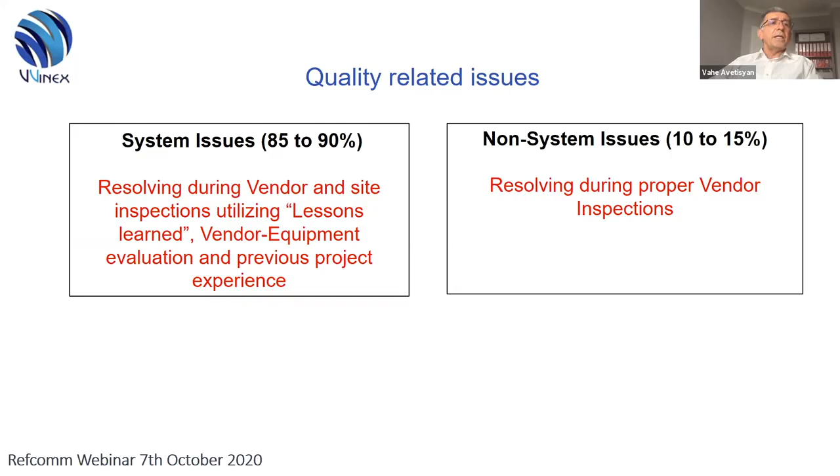System issues are those which can be predicted based on previous projects' vendor evaluation, lessons learned, and contractors' evaluation for site activities. And these issues are somewhere between 85 and 90%. As non-system issues, the following can be considered. For example, wrong connections are applied, from wrong flange size and location up to wrong cable connections and wrong cable size. Wrong painting is applied, painting system or thickness. Wrong flange type is installed, or wrong material is used for construction of valves or fittings.

And other system issues like valve leakage rate, incorrect wiring and cabling on equipment and skids, nozzle orientation and location on the vessels, tie-in points, vibration issues on rotating equipment, pump and compressor performance data, and not fully tested control systems. In today's webinar, we will concentrate more on system issues and how to eliminate them. We will mention those issues later for each type of equipment. And one important thing, as I always mention, you don't usually get what you expect, but exactly what you inspect.

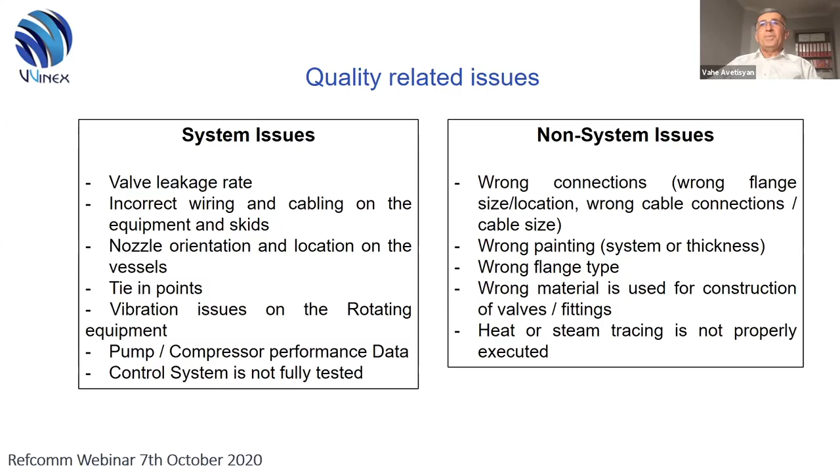Different approaches to project QA/QC affecting final results. There are three main approaches to organize and put together a QA/QC team for project control of QA/QC activities. One is where QA/QC is the sole responsibility of the EPC contractor. The second one is when QA/QC activities are controlled in parallel by EPC and owner. And the third one, when there is an integrated team to control QA/QC activities. Each of the above systems has advantages and disadvantages.

The first approach is more commonly used during lump sum and turnkey projects. In this case, all activities are fully controlled by the EPC contractor, including inspection and expediting. In our experience, this approach leads to the situation when some operational topics are not fully controlled during the manufacturing stage and can be critical during installation, startup, and commissioning, and even further for operation. Of course, this is a less costly approach, but needs a final detailed verification on site when equipment

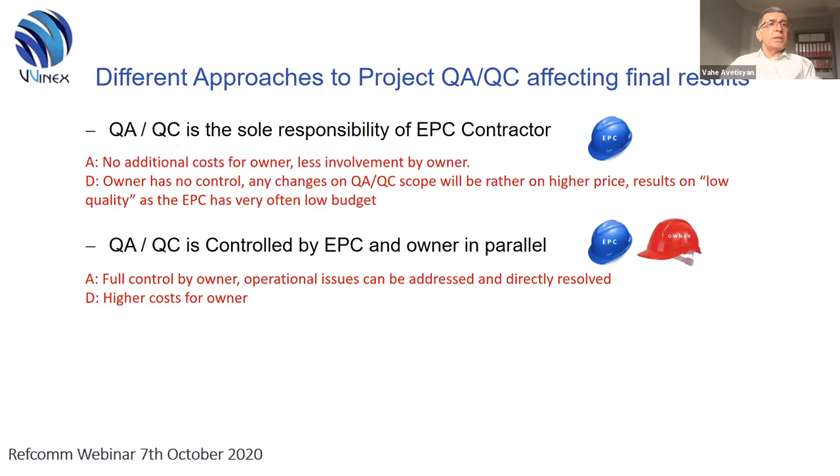Second approach is parallel coverage, when both parties, EPC and owner, are fully involved in QA/QC activities. EPC contractor still has full responsibility. However, proper input from the owner operator side can be beneficial for final results. However, this is a very costly approach as all activities are actually doubled, although that gives more complete results. As an advantage, full control by owner, operational issues can be addressed and directly resolved, but higher costs for owner.

And the third one, the integrated approach, which is a kind of combined approach where all topics, including operational ones, can be covered. But this approach requires quite a complex management of the QA/QC team, as EPC and owner in some areas have different priorities. From the point of view of total cost, this is an approach in between the first two. Less cost for owner, more coverage and involvement as an advantage, and as a disadvantage, complexity of the management of the entire QA/QC team.

Recently, I ran a poll on LinkedIn, and it showed that the parallel and integrated approaches are more preferable, and both showed about 40% of the results. That means the owner operator needs and wants to be fully involved in QA/QC activities throughout the entire project. And in our experience, the ideal approach is when owner's QA/QC team is fully dedicated only to the project.

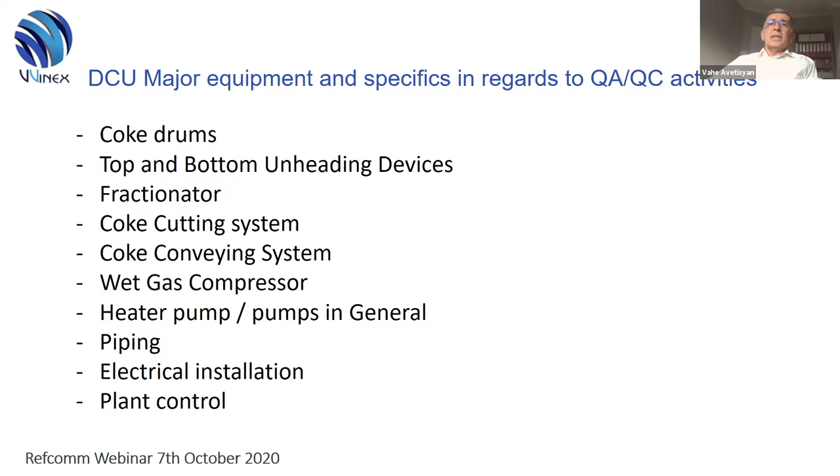Piping and electrical installation are very important because they showed more non-system issues, quality related, and these issues need to be controlled and eliminated throughout the entire production. It doesn't mean that the remaining equipment is not important, but it's less critical in our experience in regards to quality type issues. The topics discussed during today's webinar can be applied generally on all projects. However, DCU plant has some specifics.

The main specifics for the DCU project equipment are that despite the complexity of the equipment, the number of vendors is not very big. The same suppliers, same vendors are involved on different projects due to licensor restrictions, for example. Therefore, it's very easy to evaluate the previous deliveries and all other issues. Furthermore, the issues can be evaluated and applied to the other vendor for the same type of equipment.

Another important topic here is that the majority of main equipment is delivered at the early stage of the project and requires proper handling and installation before commissioning and startup. Equipment is delivered, as I said, in an early stage. Some of it is installed directly, some stored and installed at a later stage. And at this point, proper handling and storage procedures are essential.

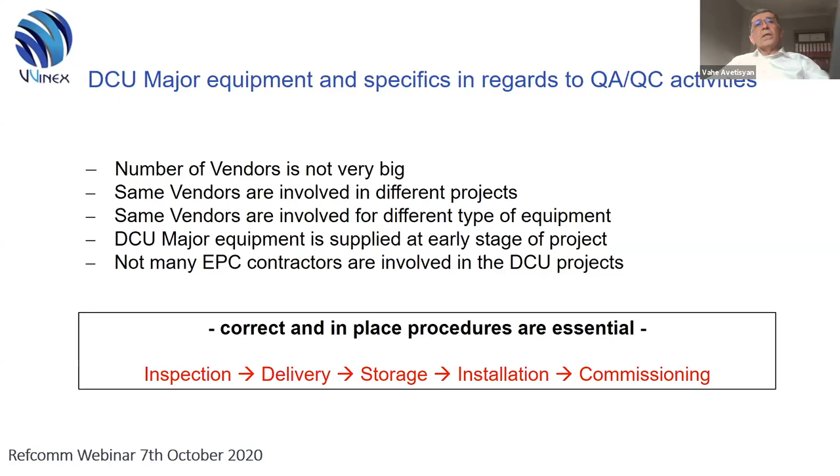Last but not least, a small number of EPC contractors are involved on different DCU projects. And this allows correct evaluation of the previous lessons learned for the specific EPC contractor. And the correct, in-place procedure for inspection, delivery, storage, installation, and verification before commissioning and startup is essential for eliminating any quality related issues. Combination of all above specifics put into a checklist allows control of the supplied equipment from early stages, eliminating any potential QA/QC issues during commissioning and startup.

QA/QC matters and aspects affecting proper operation and asset integrity. The issues we discussed are mainly affecting installation, commissioning, and startup, but some of them are also very important for the operation and asset integrity of the plant. For example, pump and compressor performance data, valve leakage rate, painting and insulation on drums, columns, piping, heat and steam tracing, heat exchanger performance data, fractionator tray supports, tray leveling. Just to name a few, all those issues have an influence on the proper operation and asset integrity of the plant.

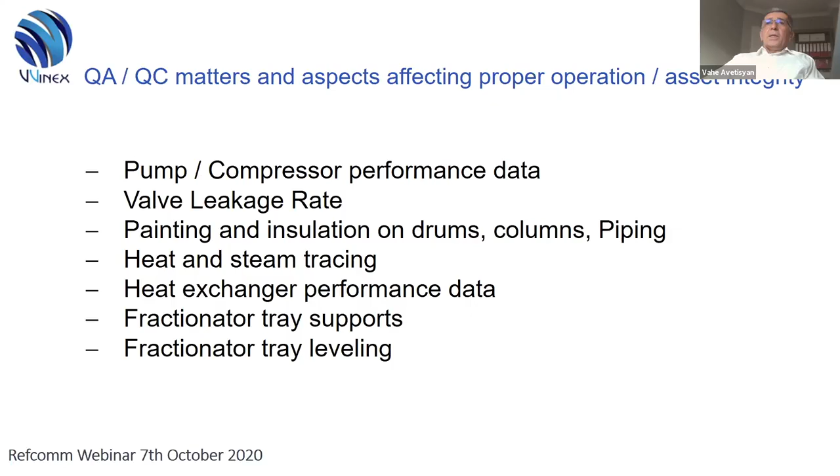And just to name a couple of examples, fractionator tray problems can cause a shift of yield from design values and result in increased costs. Only 1 ton of additional steam requirement per hour will result in another 120,000 US dollars additional cost per year. The same amount of cost will be caused by 200 kilowatts additional power consumption because of improper insulation or electrical heat tracing. Not properly insulated process equipment can cause very high OPEX and CAPEX costs. Of course, these are very low margin calculations. In reality, they are much higher on real refineries. So therefore, proper checks are essential to have all these issues eliminated prior to the deliveries.

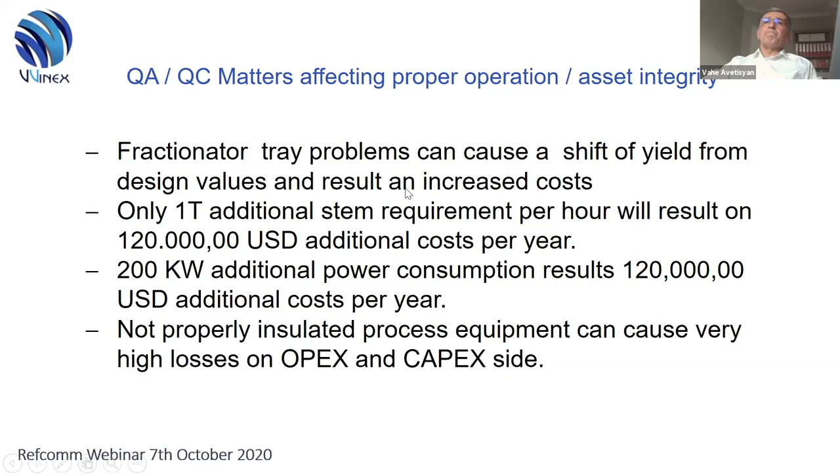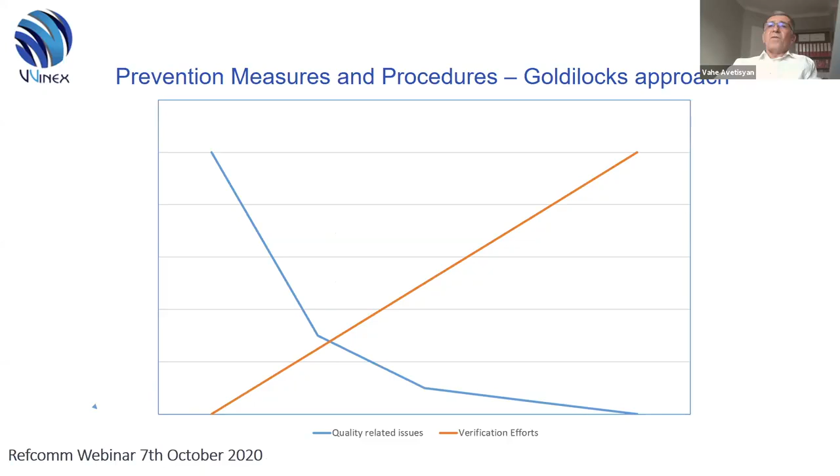This graph shows the quality-related issues and how they can be eliminated with some verification efforts. Usually, the equipment is delivered on site at this point, and it has some remaining issues which appeared or were discovered on site, and at that point, you require a big amount of effort to rectify those issues. Whether this is cost, resources, time, the efforts can be a combination of all. However, with the same amount of effort, you can eliminate those issues long before the delivery.

We added some specific verification activities based on site issues in the past, as well as the amount and volume of the checks prior to delivery. So the material comes to site completely checked and conforms to the project requirements. Also, as I mentioned before, input from maintenance and operations is also included on those checklists.

And this, in most cases, creates the ideal case where after delivery we have nearly no open issues, and no further activities are required to correct them. Because of the time restrictions, we will go through the main issues for each type of equipment which need to be properly checked prior to delivery.

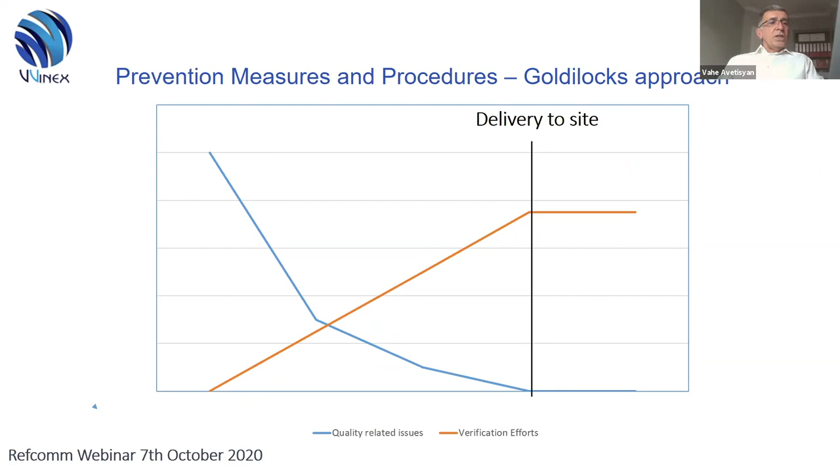Additionally, there is another issue to consider. Rough calculations show that a DCU plant allows a minimum $1 to $2 US profit increase per barrel. In average daily revenue, that will be 150 to 200,000 US for a middle-sized refinery. And with this simple calculation, any day or any week of delay for startup of the plant will cause enormous loss of profit.

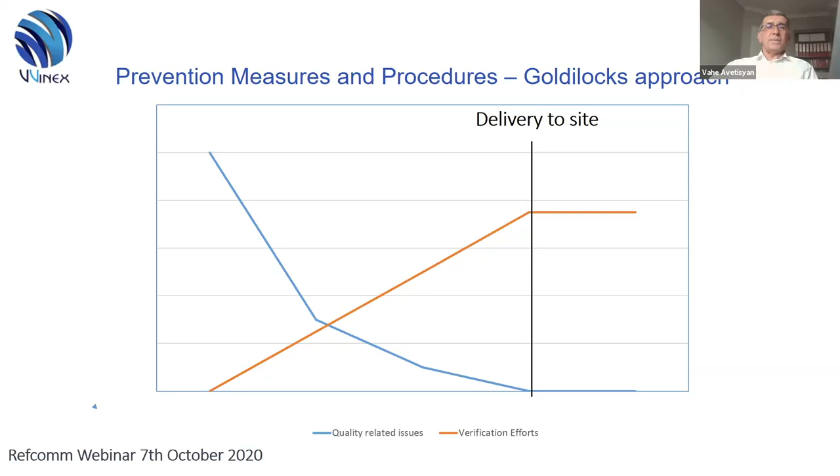Coke drums. The major issues to be considered on coke drums are nozzle orientations and proper insulation. Additionally, the provisions for the insulation are very critical, as no further welding can be done on site easily. These verifications are added on a specific checklist and allow us to check everything prior to delivery, including painting and insulation. And very important is the verification of the location of anchor bolts.

This needs to be done properly during the manufacturing stage, because any adjustment on site will not be that easy to complete, and anything not properly done on the anchor bolts will result in damage during the operation of the coke drums, which in a worst case scenario will lead to 2 to 3 weeks of delay.

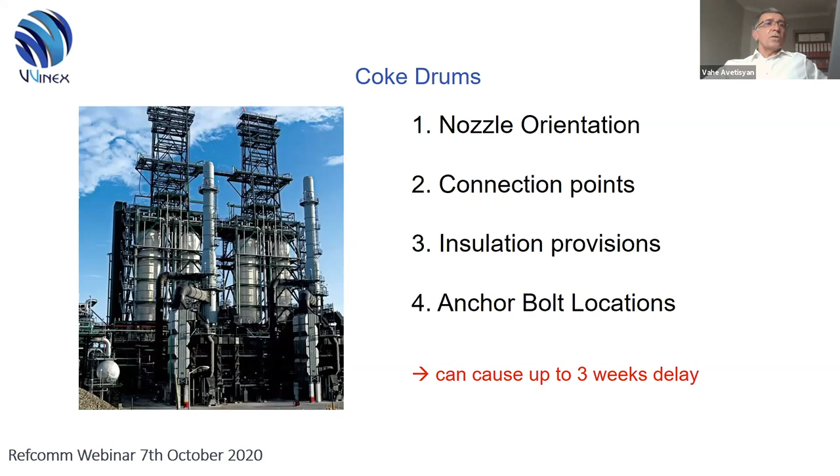Coke handling system. For this equipment, it's very important to check every part of the system manufactured at the suppliers. Usually, several parts are manufactured at different sub-suppliers, and they are only put together and assembled on site. So any adjustment or changes done on site will definitely cause double or 3 times more effort, which could have been checked and verified during the manufacturing stage.

Important is the control routine. Usually, the site acceptance test is a real-life functional check of the control routine, and it takes a couple of weeks up to 1 month, as this test cannot be performed in a simulation mode. Therefore, proper checks at the vendor facilities are very important to leave as few changes as possible on site. Also important, from our experience, is the installation of the instrumentation, which requires proper checks because it mainly affects the functionality of the control routine.

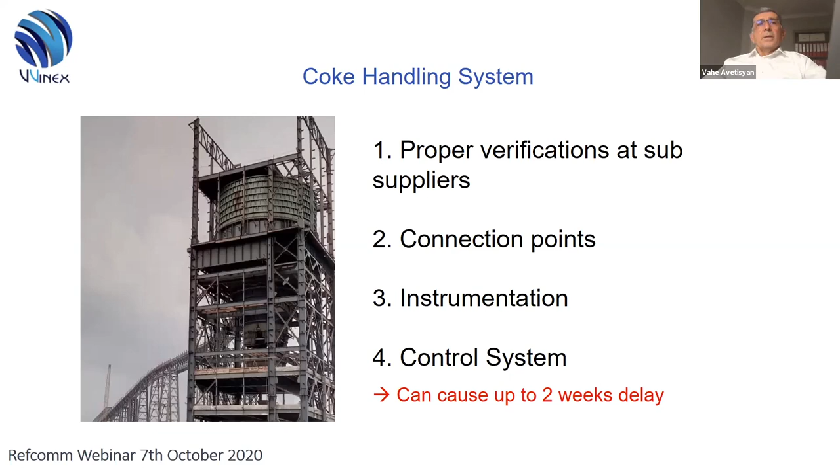Top and bottom unheading devices. These items really went through major modifications. However, there are a couple of issues which need to be properly controlled on this equipment. Regardless of whether it's a single disc or double disc configuration, it's necessary to check the leakage rate, because the discs are affected by erosion due to excess leakage. And it's very important to check the leakage at the vendor facilities.

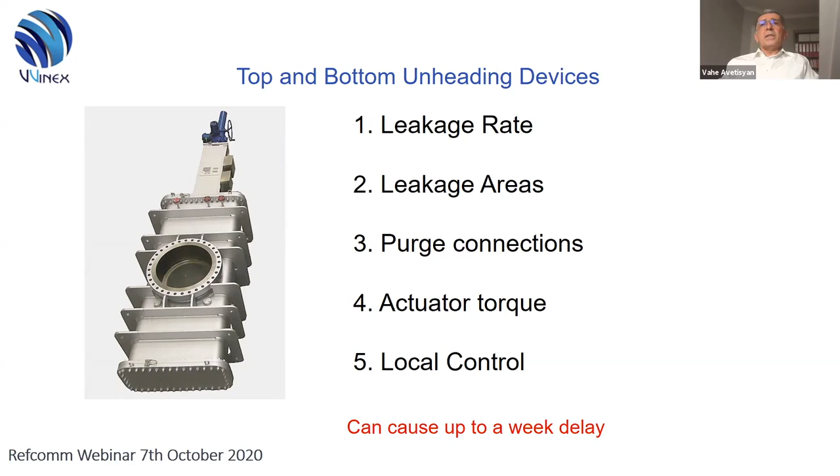If the leakage rate is, in our experience, around 75% of the allowed API leakage rate, this needs to be checked properly, because it will definitely go up during operation. Also very critical are the leakage areas, as some areas of the disc are more affected by leakage due to thermal deformation during operation. Very important are the purge connections, because nothing can be changed or adjusted on site since welding cannot be performed that easily on site. For the control routine on local control, from our experience, the important thing is the interlocking checks between 2 drums.

Next part is the main fractionator. These items have their own specifics in regards to QA/QC activities. In the majority of cases, the column itself and the internals are produced by different vendors. So each one is responsible for his own activities, and the merging of the column and the internals is performed on site. In some cases, if adjustments need to be done on site, this takes several weeks to complete. This could cause a delay in mechanical completion, but at the same time have some influence on the operation of the fractionator.

The other important issue is the verification of the installation pattern. We experienced a case when the installation pattern was not fully checked, and it took a couple of weeks to adjust everything on site. Connection points and tie points for the fractionator are very important. And last but not least, the application of proper insulation and painting, as this will protect from corrosion under insulation.

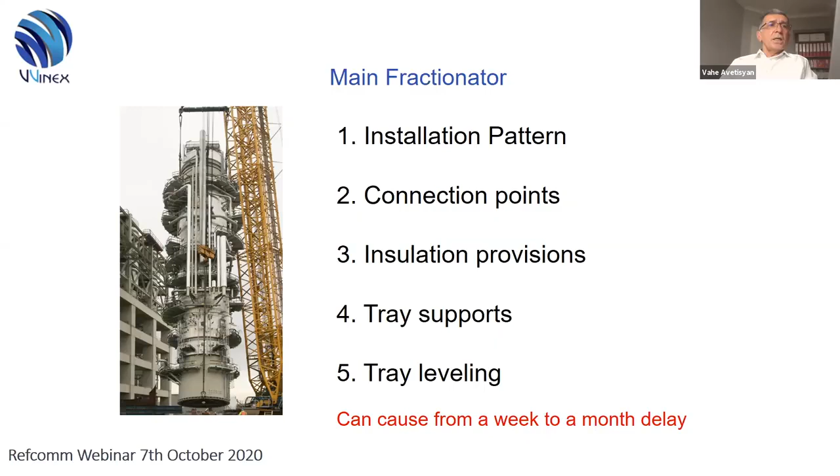Next system is the coke cutting system. This system is very complex and really requires very detailed attention. There are several reasons. Equipment is manufactured at different places and different locations. Very often it's delivered directly from the sub-supplier to site. So final assembly is done on site, which is more important. Any misalignment can only be corrected on site.

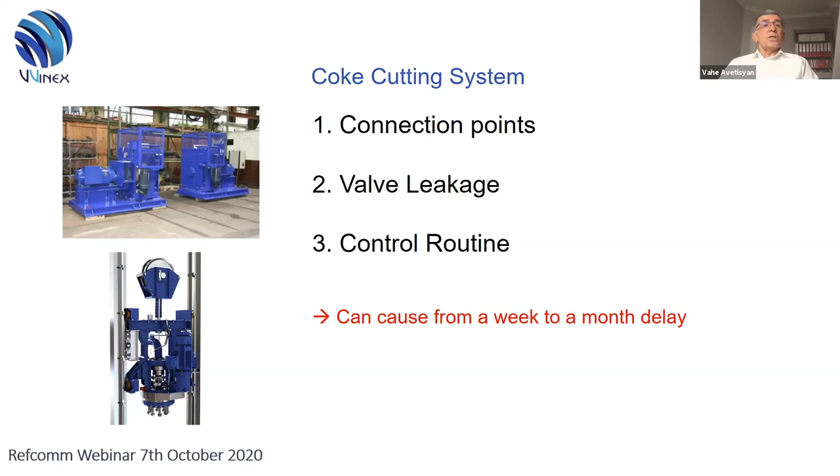Furthermore, the location and the area of this system require all the valve leakage to be checked properly. There were cases recorded when the leakage of the valve caused even damage to the coke drum insulation. Proper verification, again, of the control routine. This system can only be fully checked on site after complete installation, and therefore detailed checks at the vendor premises, at least in a simulation mode, are very important.

Wet gas compressor. We did not experience many problems with the installation and commissioning startup of the compressors, but special attention should be drawn to connection points, the main connections, inlet and outlet, and also the auxiliary connections for the lube oil system and seal gas system.

Also an important thing is control panels and control routine. Control panels cannot be rewired and rearranged easily on site, and the control routine is usually checked separately from the compressor. So detailed checks are very important to avoid any delays. We have the golden approach generally on the control routines for all systems, which says as much as possible at the vendor premises and as little as possible left for site verification and site arrangements.

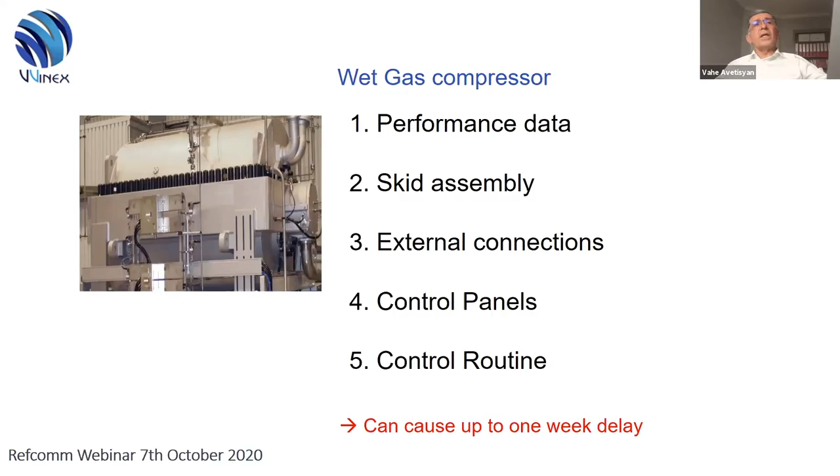Heater pump and pumps in general. Heater pumps, and generally all pumps on a project, on a plant, are less affected by after-delivery issues. However, some of them can cause long correction times, up to replacement of some parts. Very important are the connection issues: inlet, outlet, again, lube oil, sealing system, steam jackets, especially for the heated pumps.

Also very important is the vibration issue, as testing at the vendor facilities is a bit different from the site conditions. There were recorded cases when vibration checks were performed at the vendor without problems, but we experienced vibration problems on site. So again, here we have the standard approach: when the vibration level is somewhere 70 to 75% of the allowed limit, this should trigger much more detailed attention.

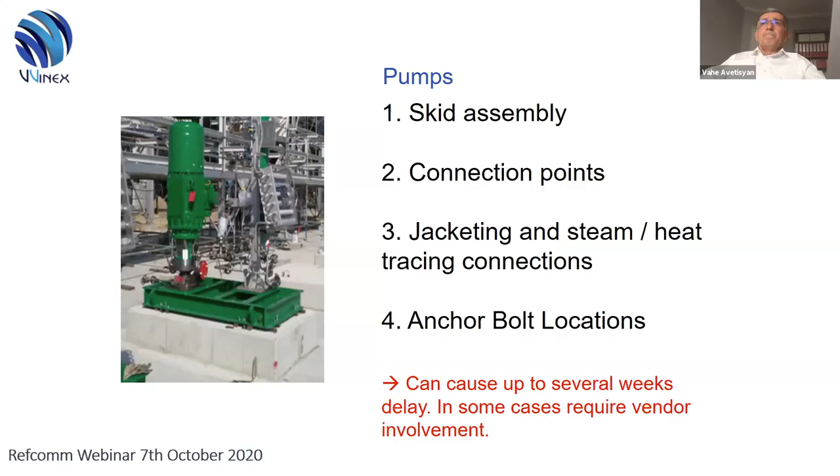So the site piping, as I mentioned before, is a very important and very complex issue. This is a really very complex task which requires proper coordination and probably the highest level of QA/QC involvement. It has several reasons, but the main thing is that three different parts and three different vendors are involved on the entire piping. One is the fitting and pipe manufacturer. Second is the prefabrication shop, and the site installation.

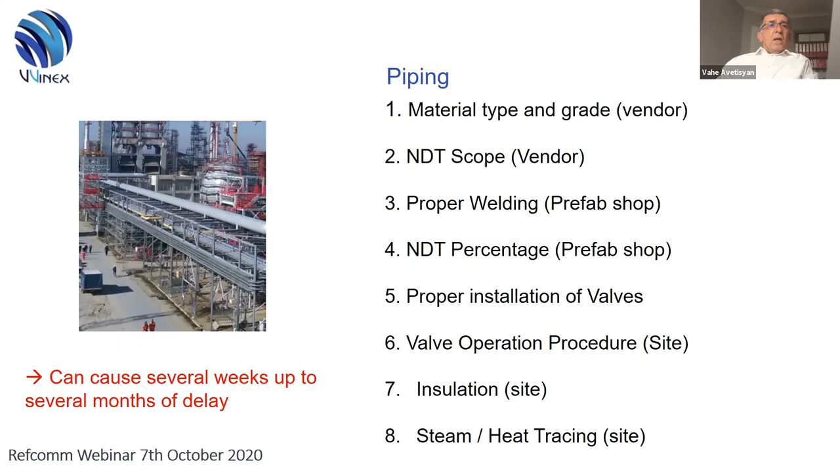The main issue here is the complete verifications at the vendor, proper welding inspections, and amount of NDT at the prefabrication shop, and site activities, including heat tracing and insulation. It's a complex task, and whatever is missed at any stage will really cause enormous delay during the correction if you start to rectify this. Also, several activities are running in parallel and proper coordination is essential. So I mentioned here the major issues which we experienced throughout several projects.

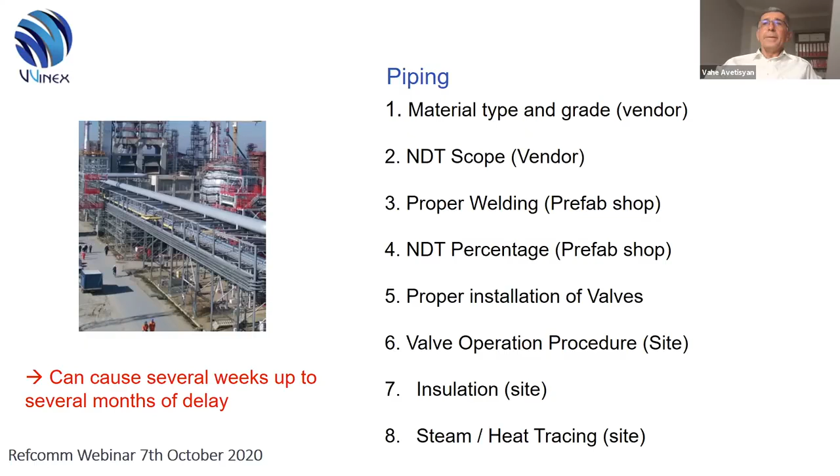Electrical installations. These activities are running mainly in parallel with piping and the installation of the main equipment, and very often overlap those. Delays on one part, for example piping, will cause a delay on electrical installation and vice versa. Another important thing on the electrical installations is that the amount of junction boxes and cables, underground and overground, is very big. And even a small issue overlooked can cost us several weeks' time and big cost and effort to rectify.

And here I want to mention also a very important thing: grounding. This involves not only design, but also authority, fire safety, and explosion safety requirements. And to correct the grounding even in one place throughout the entire plant installation will definitely be a couple of months' job.

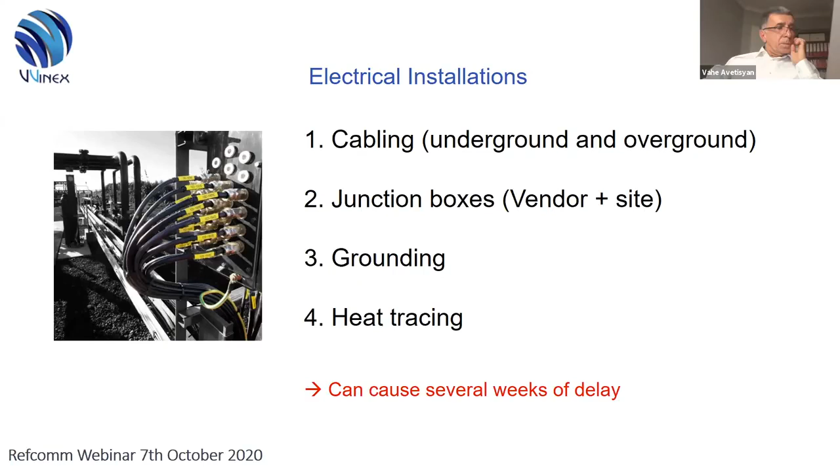And plant control. This is also one of the most complex issues. The major difficulty here is that none of the subsystems can be fully tested at the vendor facilities, as they need adjustment and finalization on site. The maximum that can be done at the vendor is a communication test with the respective SCADA or DCS system. Detailed verifications are necessary at vendor facilities for each subsystem, including full simulation tests. Integrated FAT is essential prior to delivery to site.

As few points as possible need to be left for setup and adjustment on site, and as much time as possible should be spent on checks at the vendor facilities. Also very important is the hardware issue, as any changes to the hardware could cause enormous efforts and delays to correct them and retest the entire system.

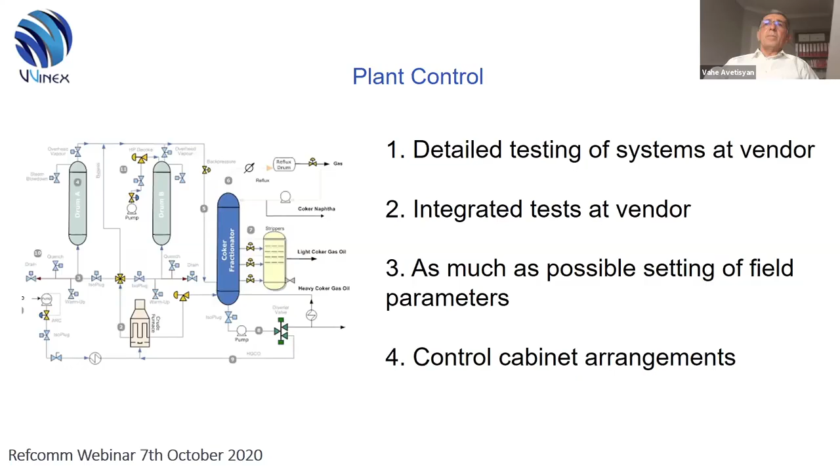The above issues were discussed for new plant commissioning, but this is very important for revamping projects and changing single equipment on a plant, because all these activities happen in a very small window and the margin is very short, and any delay on those issues can cause not only a late startup of the DCU plant, but also a delay on the entire startup of the plant.